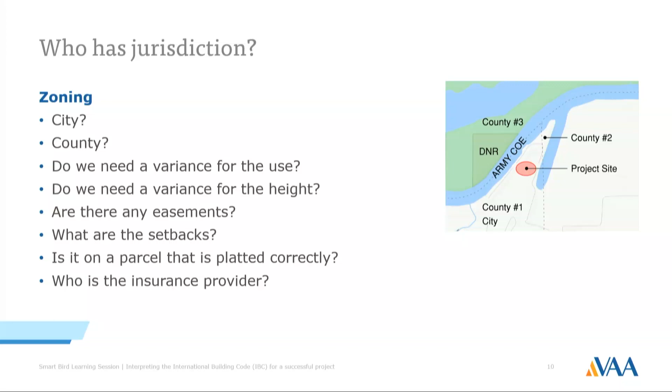Who's your insurance provider? That can be a big one. Our friends at FM Global have a long list of requirements. Some of those are mandatory-ish. Some of them are recommendations in order to get a better rate. And at some point, you have that conversation of, does it really pay to have all of these requirements, or do we just pay a bigger rate?

So what is it? What's the occupancy? We are in a B, we're in an office. And the lovely thing about having a code that was derived from other codes slammed together over the years is that once things get into the code, they're hard to get out.

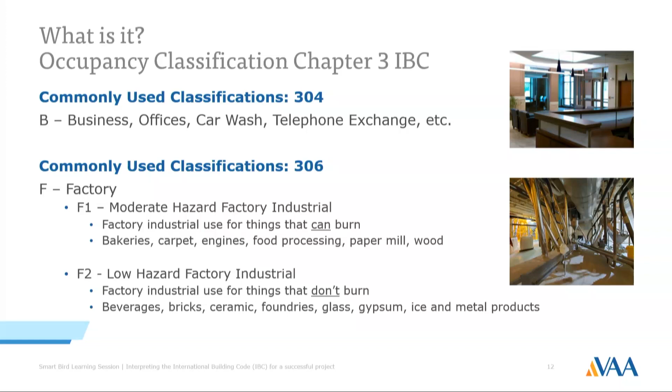So I can tell you without a doubt that a telephone exchange is a B because it's in the code. Fs are factories. F1s are factories that make things that can burn. F2s are factories that make things that don't burn. I was once told by a fire official that anything will burn if you get it hot enough, which is true, but in general, things that can burn are an F1, and things that don't burn are an F2.

Storage is the same thing. Things that can burn, like leather or fur—some of these antiquated things still in the code—those are an S1. If you have a warehouse full of ivory, it's an S2. So the things we deal with, grains, are an S1. Some of the things that fall into S2 are fertilizer. So if you have a mountain of potash, it's not going to burn.

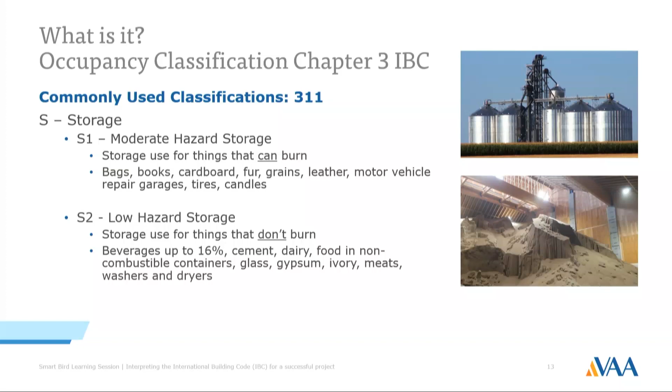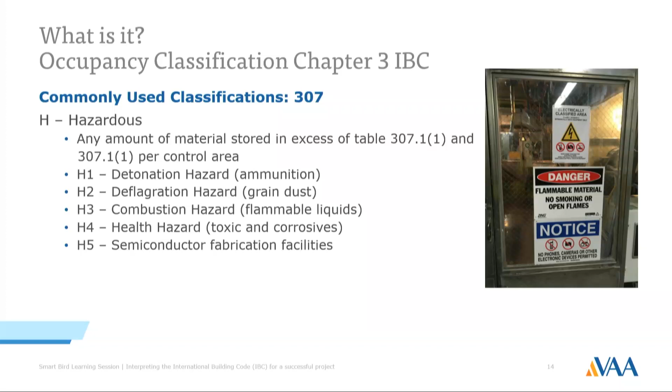H's go from 1, which is the most restrictive, to 5. H1s are things that detonate, like ammunition. H2s are things that have a deflagration concern—flammable liquids, dust, so dust in the coal industry, dust in aluminum, dust in the ag industry. H3s are combustibles, once again flammable liquids, typically not under pressure. H4s are health hazards—toxics, corrosives, large quantities of acids. And H5 is semiconductor facilities.

So how do we know if it is an H? We go to table 307.1(1). It's a big table, but they go by quantities. So if you have combustible liquids in a 3A, you're an H2 or H3, and you can have 330 gallons. And if you look at all the criteria in the footnotes, you can double that if you sprinkler, and you can double that if you have it in a specific closed system and/or in a fire room, a control area.

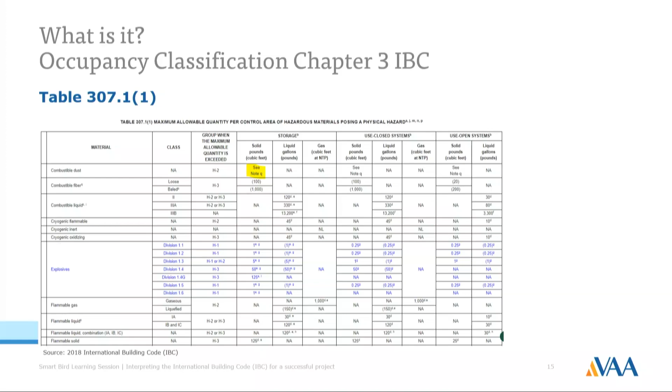Where it gets hard to quantify things is with dust. So it says dust, you see note Q. Note Q takes you to section 414.1.3, which brings in dust hazard analysis. So then you do a dust hazard analysis, which we can also help you with. There's a couple sections specific to the grain industry—combustible dust in grain processing and storage.

Usually, to have this exception of unlimited height and area for a grain elevator, you have to take the position that it's an H. And along with that comes the whole criteria of an H—you're sprinklering it, you'll have issues with ventilation, and potentially with backup generators. We don't typically take this approach because you don't want your entire facility called an H.

What we can look at is grinding rooms, because the act of grinding and producing combustible dusts are considered an H2. Once you are an H2, other requirements kick in. This section calls out that if you're an H2 and under 3,000 square feet, you need a 2-hour separation. If you're larger than 3,000 square feet for a grinding room, which is a pretty good sized grinding room, then you're a 4-hour.

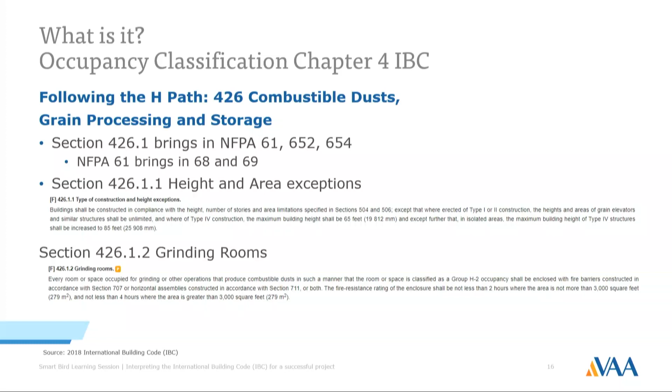And then there's all the other stuff. Architecturally at VAA, we typically don't get into these things. We have done them, and we've done them in other lives—we've done jails, schools, and courthouses—but that's not the business we're in at VAA.

So there are a lot of requirements for assembly, education, institutional, mercantile that we do. Residential in the IBC is not your typical home—it has to do with hotels, dormitories, those sort of things. And U—that includes grain silos that are residential.

The only U that I know I've worked with is, remember that pig pen we did in Uganda? Yeah, that was a U. Not a lot of regulation in Uganda on a pig pen.

So now we've got an understanding of what our building is, what type, what occupancy it's going to be. What's it made out of? You've got 5 choices. Type 1 and 2 are non-combustible. Type 3 is non-combustible for your exterior walls, but your interior structure can be anything of any material.

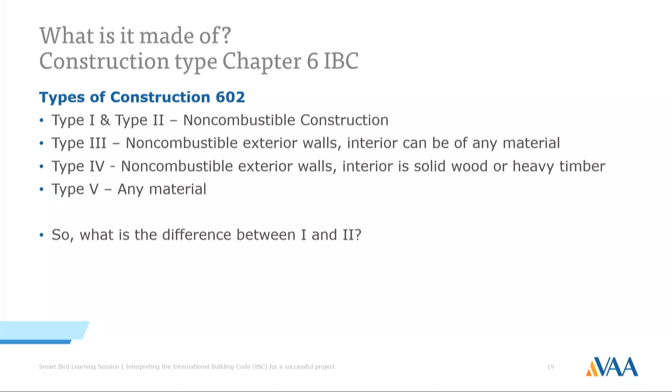So what's the difference between type 1 and 2? One of them is separation ratings. If you're a type 1B, your primary structure—exterior bearing walls, interior bearing walls—has to have a 2-hour rating. If you're a type 2B, you don't have anything. So why would you want type 1? You can go a lot larger if you're type 1. So if you're all concrete and everything is a 2-hour, it may be in your best interest to do a type 2 or type 1B.

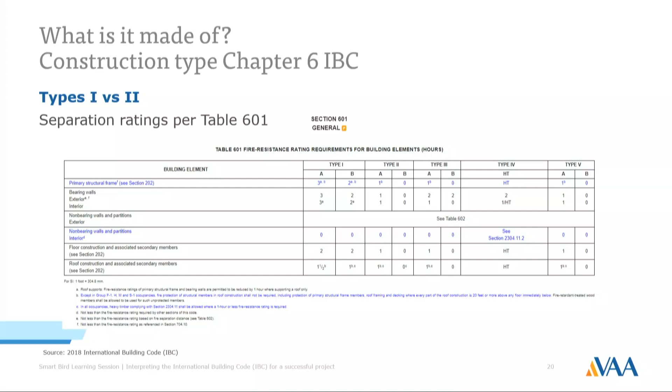There's also distance criteria. So if you have a lot line or a distance to a building and you are 5 feet, if you're 5 feet to 10 feet, your type 1A, you have to have a 2-hour separation. All the others, you need a 1-hour separation.

If you're 10 feet to 30 feet, this is a really critical number. So if you're over 10 feet to a property line, so if you're building to building, you're 20 feet away because you put your property line in the middle. If you're 20 feet, 10 to 10, and you're type 2B, there's no requirement for separation.

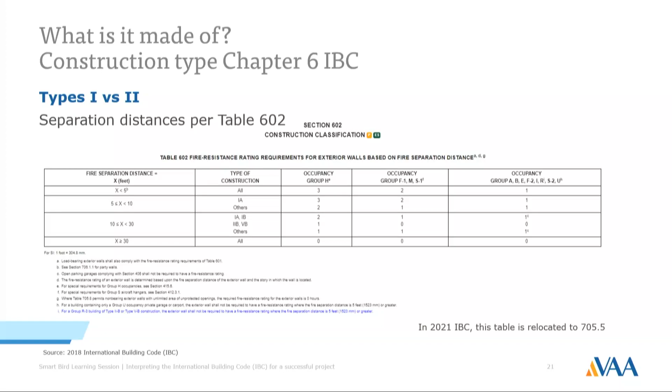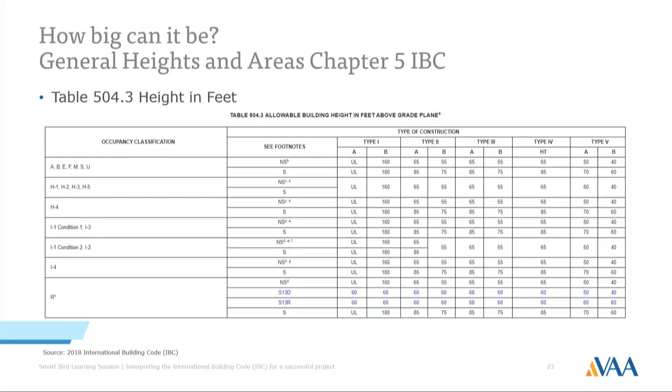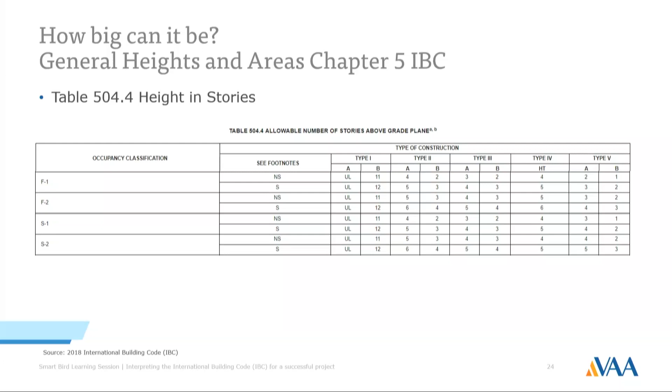How big can it be? So table 504 basically goes through the heights in feet. Pretty simple. 504.4 is heights in stories. So that sets the groundwork. Just about everything in the IBC has a follow-up. They'll tell you the rules, and then they tell you the exceptions. And the exceptions are part of the code.

So general areas, we'll take an S. So if you have a non-sprinklered S1 storage, and it's a type 2B, you can be 17,500 square feet. If you have a sprinklered multi-story, you can be 52,500 square feet. The IBC gives you a lot of credit for sprinklering.

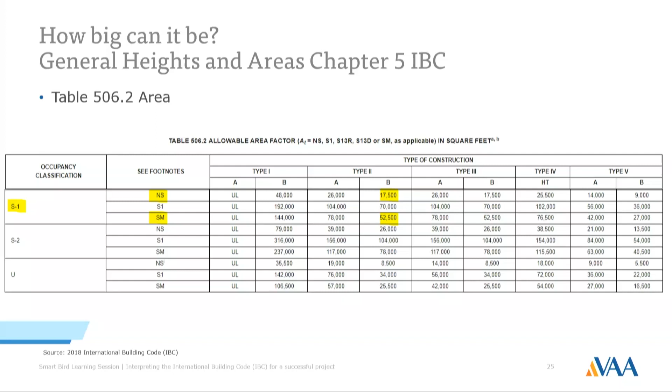So remember I said there was usually the code and the rules, and then there's some exceptions. So here's some of the exceptions to height. Special industrial occupancy, one of our favorites. It's one of those areas that they say if you need to be really tall or really big for your function, and you're a special industrial occupancy, you can be bigger than what the table calls for. You can be taller than what the table calls for.

Typically, code officials will give us the criteria for height because most of our stuff works on gravity. You gotta get something up really high and then it comes down and gets cleaned and goes. It eliminates the need for additional bucket elevators. Not all code officials give you the allowance for area because they can point to a really small mill or a really small elevator and they said, well, they made it work. So typically we can get the allowance for height under special industrial occupancy. We can't always get the area criteria.

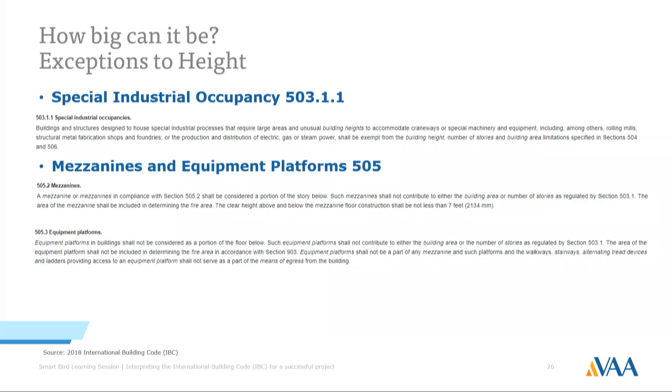Mezzanines and equipment platforms. The main criteria here is that mezzanines and equipment platforms are not stories. They don't count against your height in stories. They don't count in your area for egress. There are limitations on how big of an area you can have for equipment mezzanines and platforms, but they don't count against you.

Unlimited area. There are a couple of criteria where you can have unlimited area. So if you're a non-sprinklered F2 and S2, so those are things that don't burn, if you're single story, non-sprinklered, and you have 60 feet all the way around you, open, it could be unlimited area. If you are a single or two-story, B, F, S, or M, and you're sprinklered, and you have 60 feet all the way around you, you can be unlimited.

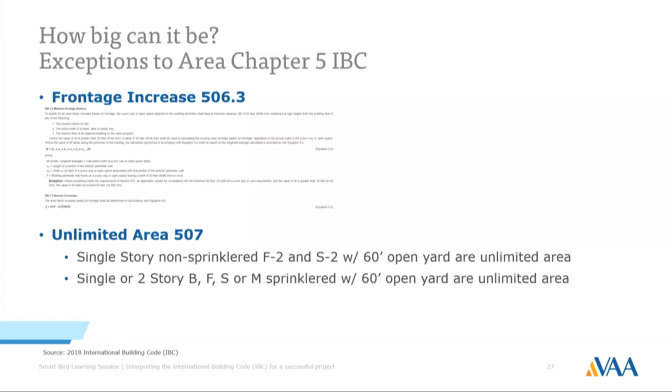Our first drawing. Frontage increase. Frontage increase is the area that is open to a public way, street, or yard. It doesn't have to be on the front. It can be on the side, it can be all the way around. So let's take this example. On the top, we have an F1. It's two-story, it's sprinklered, 30,000 square feet. From our table for allowances, a multi-story sprinklered F1 can be 57,000 square feet. So we're good.

Our S1 three-story sprinklered is 60,000 square feet. So we go to our table and we're like, oh, it can't be that big. But wait, we may be able to make it work if we use frontage increase. So your frontage increase gives you allowances for anything over 25% of the area that you use. So the first 25% that you're open gets taken off. That's, you minus this 25%. That's part of the text.

So we have 200, 300, 200. You have 230 feet here, which leaves 70 feet here. So you have 770 feet out of 1,000 feet that's open, and it's greater than 30 feet. So anytime you're over 30 feet, you still use 30 as a denominator. So 77% times 1, you get 77% additional. For the 230, we're only 20 feet, so you times 2/3. You do all the math. You get a 67% increase times the original plus the original, so we're at 87,833 square feet. So we can make it work.

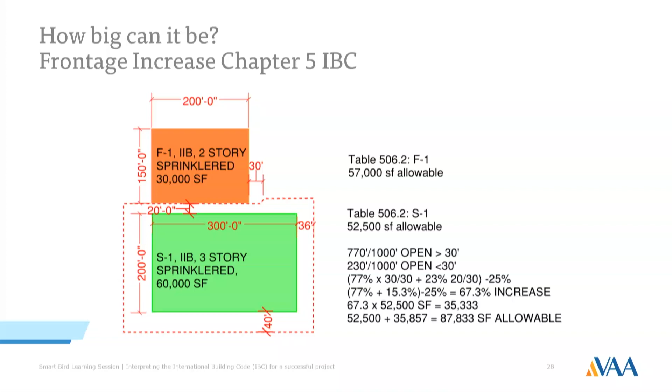That's what all these numbers mean. You take 25% that's required, that goes off. You get credit for anything above that 25% and greater than 20 feet. You can't use a denominator greater than 30, and if you have 60 feet, you can only use the 30 feet. You only get a ratio of 1.

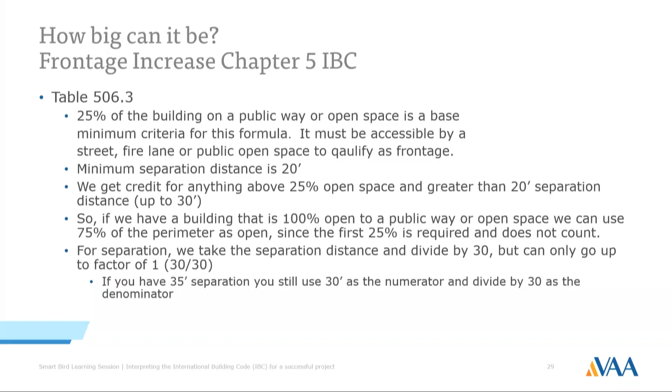What else do I need? Sprinklers. Sprinklers are required based on a couple different criteria. One is based on size. And the magic numbers are 3. So if you're greater than 3 stories for an F1 or an S1, sprinklers are required. Next number is 12,000 square feet per fire area. On F1 and S1, if you're over 12,000 square feet per fire area, sprinklers are required.

24,000 feet, if all of your fire areas are over 24,000, sprinklers are required. And then you get into some interesting ones like mattress factories and storage of mattresses, which we've done. You don't want to see where all the recycled mattresses from Minneapolis go. It's not pretty. It's really not up to code either, but they get into some areas where, yeah, if you have bulk tire storage.

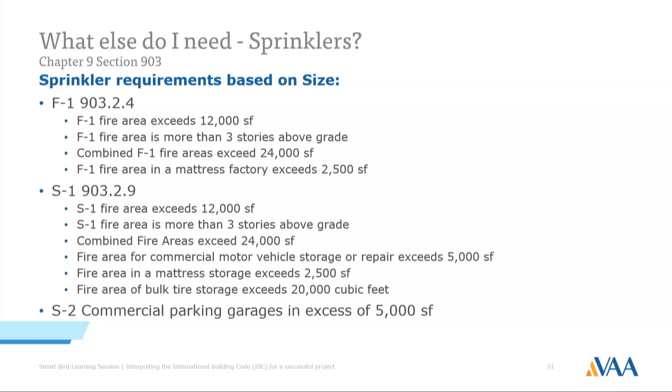One that came up recently is if you have commercial motor vehicle storage or repair that exceeds 5,000 square feet. So commercial motor vehicle storage. Would you consider a loadout or receiving commercial vehicle storage? Anyone? No. Well, the state of Wisconsin does. And since we apply through the state of Wisconsin, when the state of Wisconsin says we see it this way, and we say, well, we don't see it this way, they say we are the state of Wisconsin, we see it this way.

There are alternatives. You can approach the ICC for an official ruling, but those rulings take a while. So for that project, we ended up putting in a divider wall to break that up into 2 fire areas so that your total fire area is less than 5,000 square feet.

Why else would you need sprinklers? Area and use. So there are certain things, just because of the use, they require sprinklers. So H's. If you're an H, you have to sprinkler. If you are an R, all R's that are governed by the IBC. So remember, those are the big ones. The dormitories, hotels. Those are not your average home. Those are covered in the IRC, the International Residential Code. But if you're in the IBC, all your R's are required to be sprinklered.

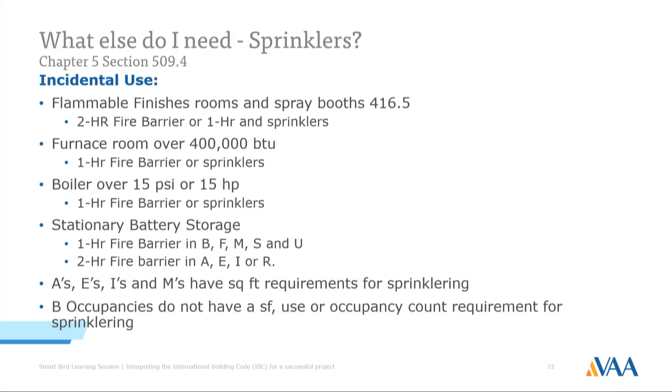In addition to that, A's, E's, I's, M's all have square footage requirements. We don't get into those a lot, but they do have square footage requirements. B's, business, no use requirement for sprinkling. No square footage requirement for sprinkling. When was the last time you were probably in a B occupancy that wasn't sprinklered? Yeah, exactly. And I'm done, thanks.

Yeah. How about sprinklers in electrical rooms? Sprinklers in electrical rooms. Yes. So if they're in a sprinklered building, that is required to be sprinklered. But in NFPA 13, there's a regulation that says if it's just used for electrical equipment and you're not storing anything that's combustible in there, you can separate it with a 2-hour wall and not sprinkler it. Yeah, because sprinklers and electricity is not good. That's the key takeaway, Dan, from this. Sprinklers, electricity, bad.

Any other questions? Yeah. So how do you handle warehouses where you store a lot of wood pallets? Wood pallets. Oh, yes. How do we handle warehouses that store a lot of wood pallets? So you got a building that doesn't meet any of the requirements to be sprinklered. Yep. It's type 3, it's CMU block walls, but at any given time you could have 2 to 3 semi-loads of pallets. So you're storing combustible product in there, when usually the standard thing you're storing is non-combustible, right?

The fire official can say that now you have combustibles in that area and that portion is an S1 instead of an S2. They can require sprinkling, or they can require that your fire load be kept under a certain criteria, which is another seminar; Kelly may be able to talk to that later. Any additions? Height is a big one. Yeah. And that loading is a big one.

Yes. So I was just more curious how you guys handle it, the things that we typically store. So the question was, how does VAA handle storage of wooden pallets in areas that are in S2? Typically, in the facilities that we're using for storage of S2, our commodity is not always palletized, right? So our fertilizer is not always palletized. Seed gets into an interesting area. We've worked with seed before.

See a few people smiling around here, frowning. Yes.

But if you can't store them outside because of the wood and the weather, it is going to be a discussion point with the AHJ or the fire marshal.

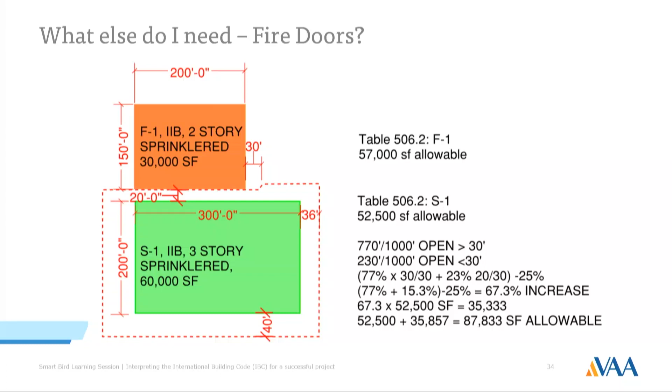And that would be a firewall because you're connecting two buildings that are not the same building. And that firewall is the type of system you use between those two. And then we'd have to go to table 706.4 that says that's going to be a 3-hour wall and a 3-hour door. But we considered this one building and this one building. And that's our approach. But if we take a different approach, what would happen if we consider it one building?

So if we have one building, now we have 100% all the way around. That's over 30 feet, right? So we get the full 75% increase. So now our 60,000 plus our 30,000 square feet, our allowable is 91,000. So we're taking the most restrictive use, which is the S1, because it has less allowable area. And by open frontage, even though it's not connected, we can call this one building. And if you're one building, you can put a door here.

Now, the math on this miraculously just works out, right? And it's not going to be like that in every situation. The key here is to look at how you approach the problem. Which path do you take? You could call this one building, you can call it two buildings if it works. You can use area percentages to try to make it work. The code official usually wants to see what route you took and if that route meets the code. And there's usually several different ways you can walk through the code.

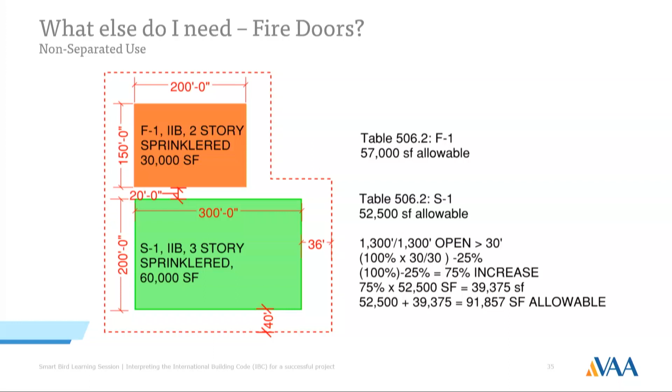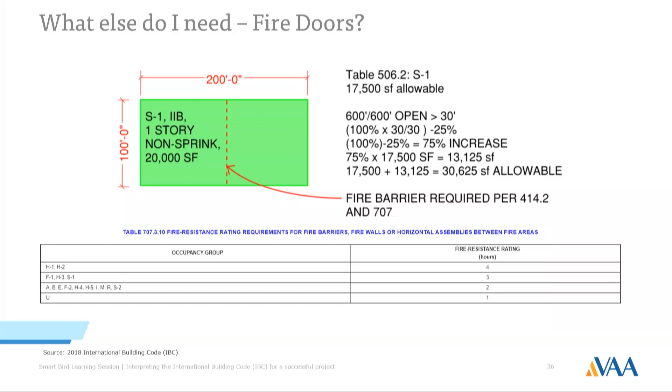Now, we come into a lot of these situations where this was built, and at some point it gets added onto, and added onto, and added onto. We can't always control what we walk into, right? Some of these things have been grandfathered in, but we'll talk about that in a minute. So fire barrier is what we would use here.

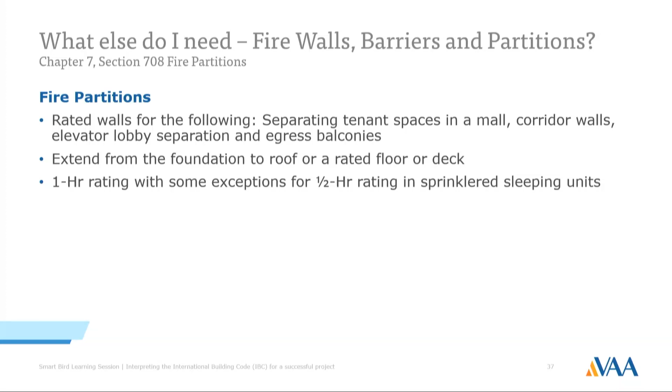But what's the difference between a firewall, a fire barrier, and a fire partition? Fire partitions are the lowest level, right? So those are used for corridors, elevator lobbies. They're usually rated an hour. They can be all the way down to half an hour.

Fire barriers are the ones that we use the most. Those are shafts, elevator enclosures, stairways, exits, horizontal exits, control areas. So if we're breaking a large area into little boxes of fire or hazard to eliminate our total quantity, it's a fire barrier. Fire barriers can range anywhere from 1 to 4 hours.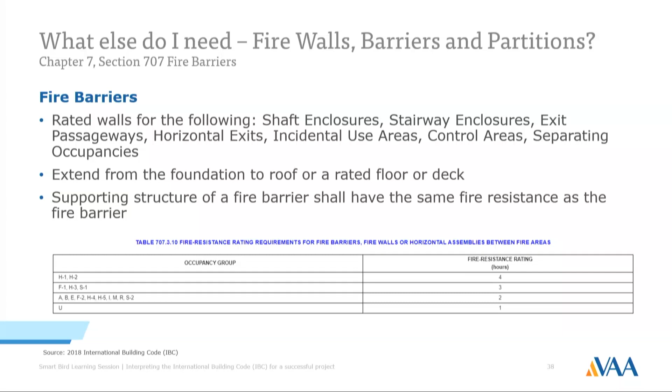Fire walls separate two buildings, whether they're actual wall-to-wall or if they're one wall and it's too close to another building. The issue with firewalls is they have to be structurally sound so that if either building on either side falls down, that firewall remains. All our structural engineers are thinking, well, it's not tricky, but it's usually expensive.

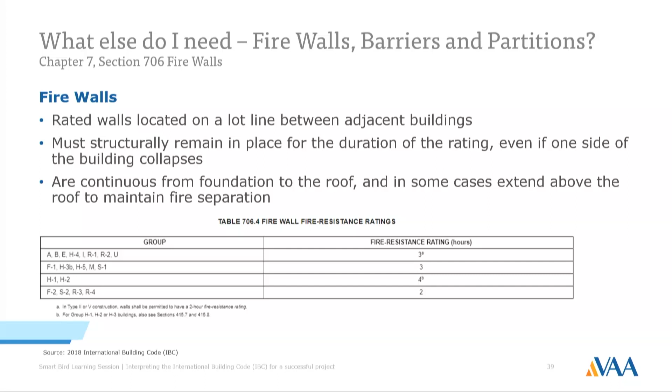So if you have a firewall or a fire door or a fire partition or a fire barrier, you would go to table 716. It tells you that for each of these areas, if you have a rated wall that's 2 hour, and it's an exit enclosure stairway, you need an hour and a half. 3 is 3, usually 2 is 1.5, 1 is 1. They use this table to figure out what the requirement is for your doors or openings.

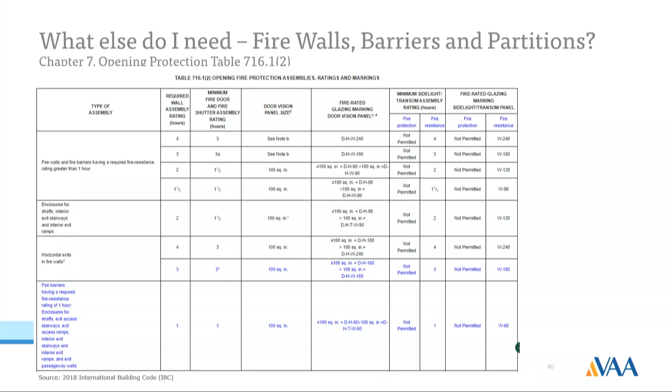Fire-rated shafts, stairways, elevators: if you're connecting 4 or more stories, it's 2 hour. If you're 3 or less, it's 1 hour. This is where we remember that mezzanines and equipment platforms are not stories. Basements are, but equipment platforms and mezzanines are not stories.

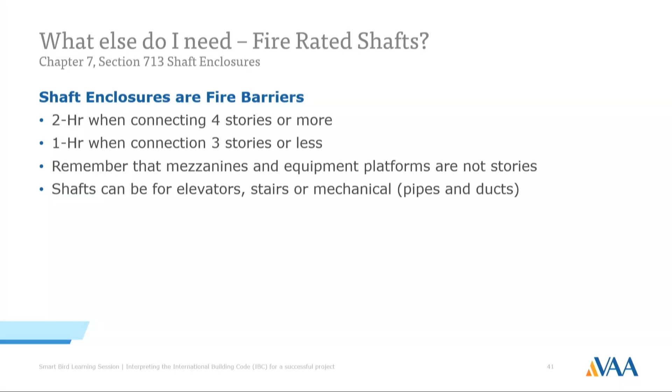So let's take an example. We have a 3-story S1. We are separating our stair on these 2 sides because we're separating it from the building. There's nothing to separate it from out here, so these walls are not required to be fire rated. If we have an exterior stair, you have your fire barrier here, so on this would be 1 hour, and then you have a 1 hour extension for 10 feet.

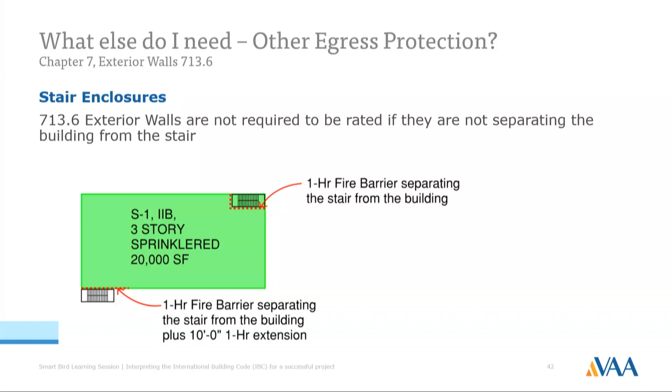So if this was a 4-story, you'd have a 2 hour, but then this 10-foot extension is only required to be 1 hour. Now, sometimes when we do that, it's easier just to build that second part as 2 hour because you already have the materials coming. But those are the requirements.

Allowable area, per occupant... I can't catch them all. This is what you need for egress. This also determines technically your number of employees that you will need for restrooms.

More on that later. There's a table that says that if you are accessory, storage, or mechanical, you divide by 300 square feet. If you're industrial or business, you divide by 100 square feet. If you're business and you're using the 2018 code, it's 150 square feet per person. So in 2018, you're allowed more space in an office per person than you are in an industrial facility. I can't explain it. I mean, it's the code, right?

They determine the number of people you need, or the amount of area you need for egress. So we get this question quite a bit: well, we're not going to have 43 people in our loadout, that's ridiculous. No, but you can egress 43 people out of your loadout.

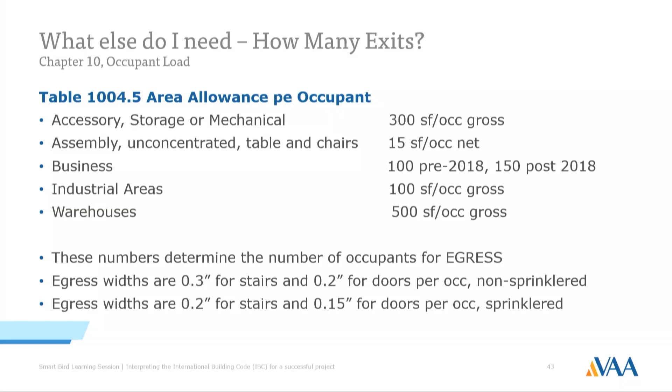Usually on the facilities that we do, the egress capacity isn't the driving factor. When you get into assembly, you're dividing by about 15. Gotta love the code. If you're doing a bowling alley, I can tell you exactly how many people it has, because it has requirements for your approach lanes and for your bar area. But as close as they get to grain is industrial. Warehouses are great, that's 500 square feet per occupant.

Spaces with one exit. We get into this quite a bit: we're only going to have 3 people up there, will one exit work? Well, a couple of things come into play: the occupancy that you're using, your common path of travel, and whether or not it's sprinklered.

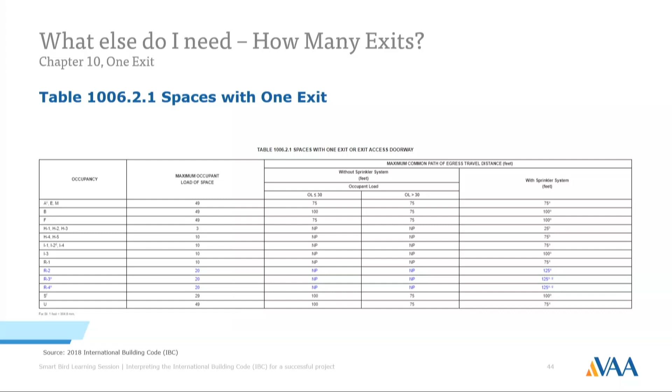With a sprinkler system, your common path of travel for a B... without it, if your occupancy is less than 30, without a sprinkler system, you can go 100 feet. If you're without sprinkler and over 30, you can only go 75. The key ones to look at here are H. So if you have more than 3 people, you need 2 exits, and with a sprinkler system, you have to be able to go right or left within 25 feet.

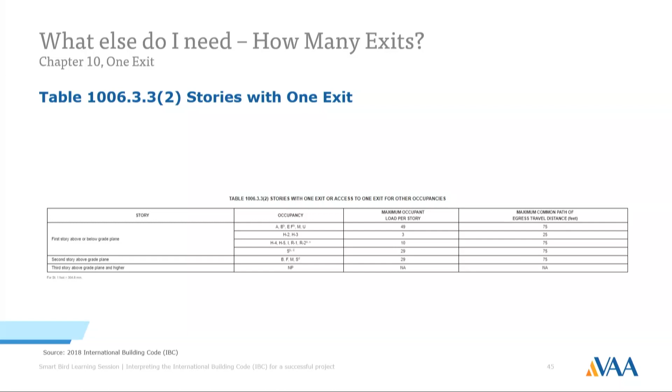So what's common path of travel? I should have asked that question before I got to the slide. Common path of travel is how far you can go before you can go right or left.

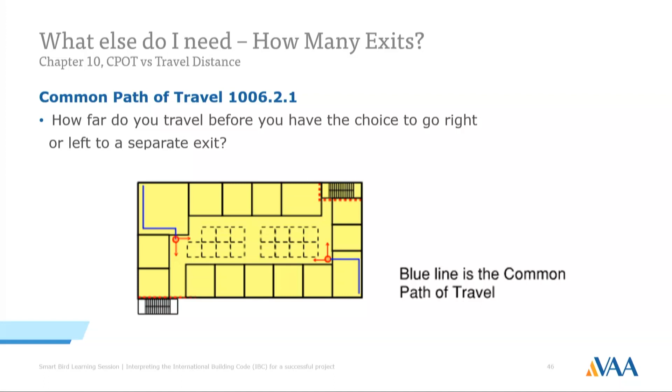And how far can you go before you reach an exit? That is travel distance.

Remember when we said the IBC was a collection of older codes? One older code said you could go 200 feet. One older code said you could go 300 feet. So the IBC says you can go 250. That was the logic - they have a meeting and discuss, and they say well no, it's got to be 200, no it's got to be 250. Deal. And it's been 250.

And it probably is not going to change. Those are pretty well set and haven't changed. Well, that one has changed.

So your travel distance - you're coming from your furthest point, and that's all the way to either grade or a rated enclosure. You got to get to a safe exit. So a rated enclosure is a safe exit.

And where that helps us is if you're on the 6th story of a flour mill - do you think you can get down in 250 feet? Probably not. So your stair is already a rated enclosure because you're over 2 stories. So you're 6 stories, and as long as you can get to that rated enclosure, that's when you stop your travel distance. You don't have to get all the way down.

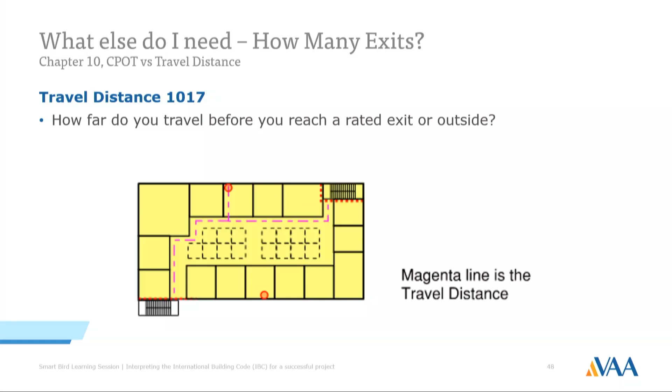Any questions? Travis asks, is that exterior stair considered a rated enclosure? Yep, if you have the separation here and the extension.

According to the IBC, fire doesn't turn 90 degrees or 180 degrees. So a fire on this side, you can still get down. And it's real - people have debated these things for at least 20 some years.

What about the ladder question - does a ladder count as an exit? A ladder does not count as an exit per the IBC. A ladder does count as an exit per OSHA. So areas and buildings governed by the IBC have to have egress per the IBC. In areas and structures governed by OSHA, you can have OSHA egress.

What pitfalls do we encounter? Here's the fun stuff, here's where I want to see a lot of comments - grinding rooms. So what we know is that they are an H if there's a hammer mill, because a hammer mill does two things: it creates dust, and there's a potential for spark. Roller mills, typically we do not classify as an H - there's less dust, there's less room for a spark, and because section 426 in the code specifically says hammer mill.

I mean, you don't try to read a whole lot into the code when it says it's a hammer mill. Well, a roller mill is not a hammer mill, and we've been down that road many times.

H's require sprinkling - black and white in the code.

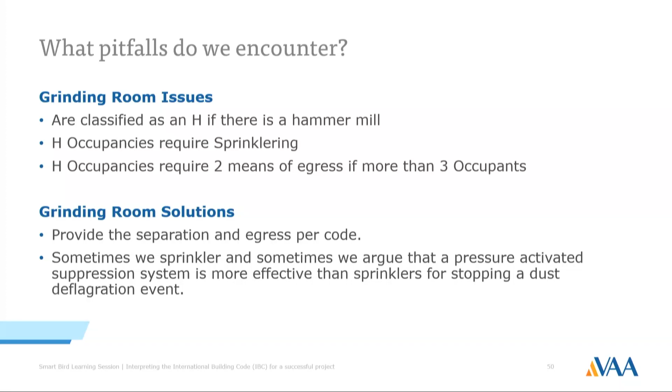H occupancy requires 2 means of egress if you have more than 3 people - so that's not a very big hammer mill room. So what do we typically provide? Typically we provide 2 exits, typically we provide the fire separation, and typically we ask the AHJ. In the event that we have an issue in a hammer mill, the issue usually isn't a fire, it is deflagration - it's a sub-sound barrier explosion. It doesn't break the sound barrier, but it is a flash.

In a flash, your sprinklers become water features and they get destroyed. The things you're trying to protect are typically in the hopper, in the grinder, or in the plenum—things that can't be reached by a sprinkler system. Things that react well to a deflagration event are fire pressure cannons, but those have issues too: you have to test them, and they're expensive.

So you can sprinkler, or offer alternative means used throughout industry. A lot of times in smaller facilities, the grinding rooms are the only areas required to be sprinklered because of size or compartmentalization. If you don't have fire water, are you going to put in a fire tank just to sprinkler that area? Or can you argue that a fire cannon is a better alternative to sprinklers?

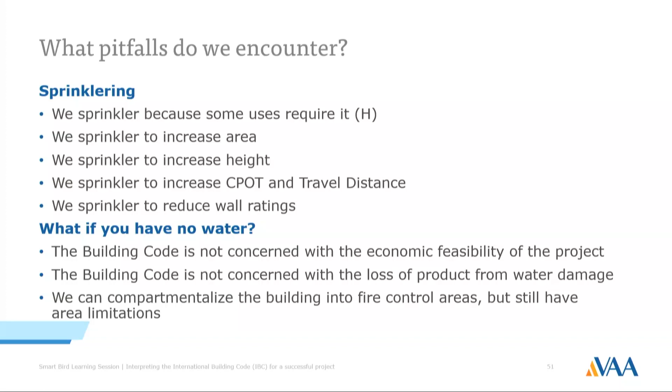They like sprinklering. Yes, Alex? Given that those sprinkler systems are expensive, with reference to wall ratings, when does it become less expensive to sprinkler versus use a higher rated wall? The question was, since sprinkler systems are expensive and we may not have water issues or connection, when is it more cost effective to rate the wall rather than put in a sprinkler?

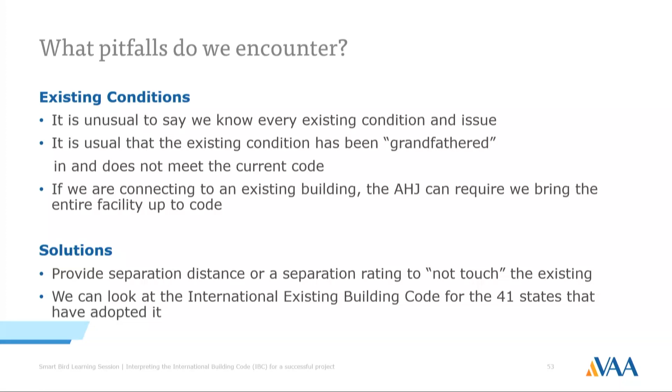There's a couple of answers. One, if you have an existing facility—tunnels, existing conditions. If you have an existing condition, something that's been grandfathered in, our approach is not to fix all the ills from years past. You put up a firewall and say, from this point on, we are code compliant, and this we will do the best we can with. In existing conditions, if you're trying to put up a firewall in a process-heavy area, you're dealing with existing pipes, conduits, and ducts, and a lot of that can't be taken down or replaced without a shutdown of the entire facility. So it's feasibility—not necessarily the cost of the firewall, but can we actually build it? Does that answer your question?

Yeah, just a follow-up question: how much more expensive is a 2-hour rated wall versus a 1-hour? And does it get exponentially more expensive as we add hours to the rating?

So the question was, how much more expensive is a 2-hour wall versus a 1-hour wall? You can build a wall out of gypsum board and steel studs—a layer of 5/8 on one side, a layer of 5/8 on the other. That's 1 hour if it's type X. For the cost of another sheet of gypsum board, you put two on one side and two on the other—that's 2 hour. When you get into block, a CMU wall, 8 inches wide is 1 hour. You can get a 2-hour block with a thicker wall and lay it up at the same installation cost, and you have a 2-hour wall. You can take a standard 1-hour CMU and fill the cores, and then you've got a 4-hour wall. The cost difference with an IMP rated wall—2 inch, or a 4-inch that's a 2-hour wall, a 6-inch that's also a 2-hour wall—between 1 and 2 there's not a big difference. You jump up to 3, and there's usually a larger cost jump to 3-hour walls.

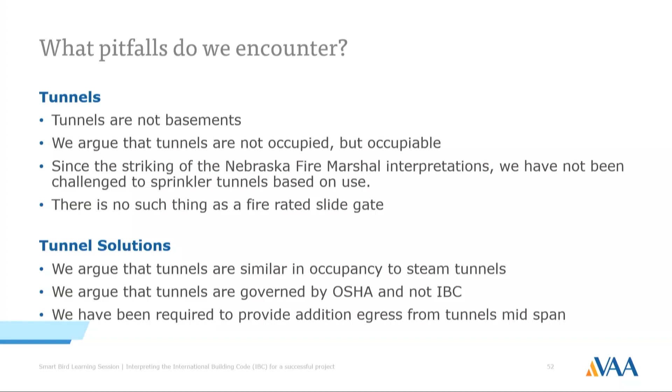We did have an issue where we had a large series of bins, and the code official said, well, this is an S1—yes it is—and this is an S1—yes it is—and that's an S1—yes it is—and you're connecting it with a tunnel—yes we are. Where's your fire rating? There is no fire rating between those. They don't make a fire rated slide gate. Not that I know of, Mark. No.

So they're saying, well, this is connected to the tunnel, which is connected to this, which is connected to this. You're exceeding your fire area. Then we bring in criteria from the grain industry saying that grain doesn't really burn, it smolders. And we go down that path.

In Nebraska, we were doing work, and the fire marshal said you must sprinkler your tunnel. Well, why? Because I made an interpretation, they're saying you must sprinkler your tunnel. Okay. We did another job in Nebraska, and we're like, we're going to have to sprinkler the tunnel. So we did that last time.

But we couldn't find it on the state fire marshal website. So I called the state fire marshal, this is a new fire marshal by the way, and said, hey, where are all the interpretations that used to be on the website? Yeah, about that. Apparently the legislature in Nebraska said those interpretations were changing the code without proper judicial review.